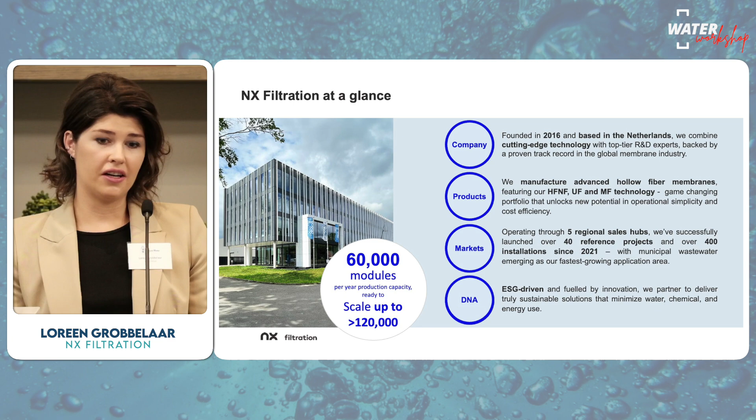It's well known that water scarcity is not only in South Africa, but globally. Climate change is contributing to groundwater sources being exhausted. Taking that into account, about 60% of the world's population currently lives in water scarce areas, leaving 2 out of 7 people without access to clean drinking water. That being said, there is a need for alternative sources to be used instead of just groundwater.

But these sources are usually polluted with micropollutants and medicinal waste. Just taking, for instance, the wastewater that we produce from normal domestic sewage, that is being treated conventionally, and that conventional treatment is not equipped to remove medicinal waste, for instance. And that effluent is just discharged into our rivers, where we then abstract water for drinking water using again conventional systems which do not remove these micropollutants.

So with that being said, there's a need for alternative technologies, new technologies. And with NX Filtration's nanofiltration membranes, we can remove some of those micropollutants without the need for chemical use, applying that water almost directly to the membranes.

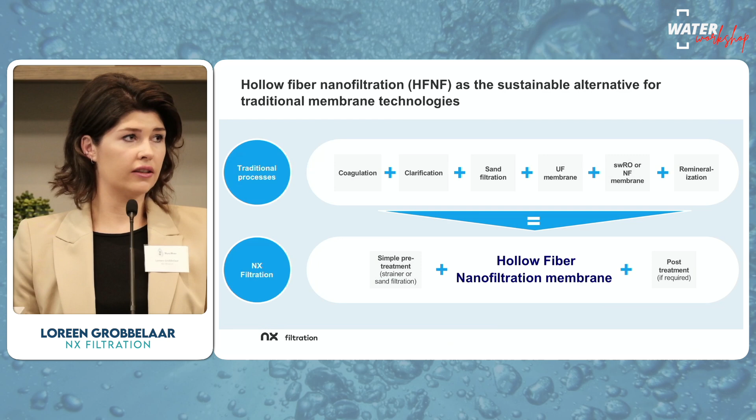Taking, for instance, a simple pretreatment like a strainer or in some cases a sand filter, and applying that filtrate to a hollow fiber nanofiltration system with a post-treatment can give you the same water quality or even better.

If we compare traditional nanofiltration to our hollow fiber nanofiltration membranes, what is the difference? We claim that our membranes can basically take on worse feed water quality - increased turbidity, suspended solids, which we take around peaks of 300 ppm, and also CODs ranging from 100 to 1,000 ppm.

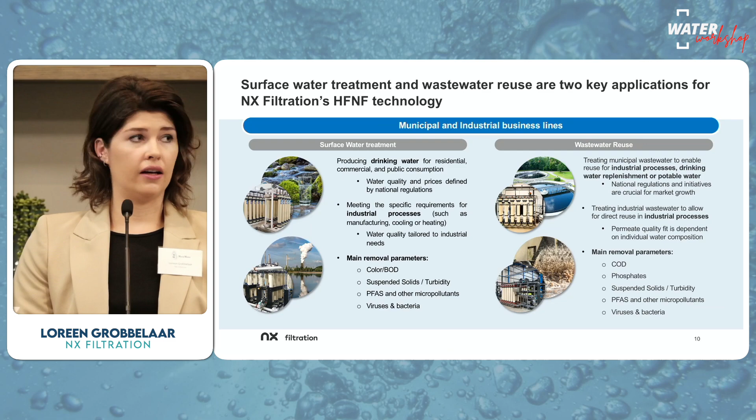On the industrial side, we've seen, for instance, pulp and paper - any wastewater that has been treated biologically can also be applied to the membranes relatively easily. In both cases, the main parameters that would be removed are organics, COD, BOD, color, and also some suspended solids turbidity, and then PFAS and micropollutants.

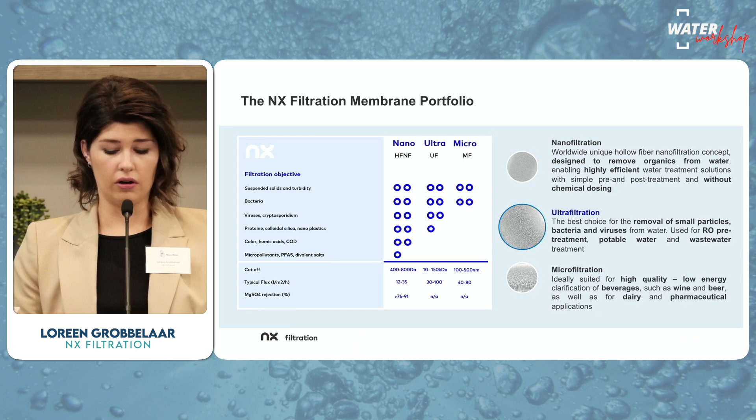Our filtration principles also apply mostly for the nanofiltration. All our membranes are PES based, single bore, and inside out. So with the PES membranes, should you use our membranes, you could be covered for future regulations where PFAS could become an issue.

On the ultrafiltration side, main applications would be potable water, municipal wastewater reuse again, and reverse osmosis pretreatment. That's where we mostly apply our ultrafiltration membranes, and then also in industrial wastewater reuse.

We've got a global base of ultrafiltration membranes, which might be something new to you because we are a nanofiltration company, right? So I will cover a little bit later that we also have a few replacement products available for the membranes that's currently in the market.

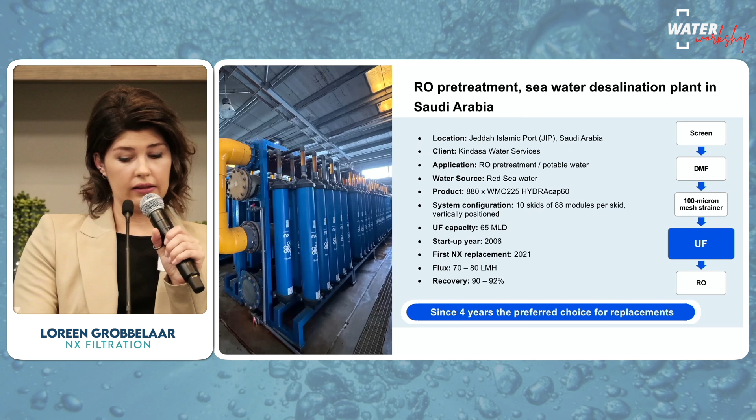RO pretreatment for seawater desalination in Saudi Arabia. At the port of Jeddah, we have a customer, Kindasa Water Services, which was one of the good performance declarations shown earlier, treating seawater from the Red Sea. There we've got 880 modules installed, the HYDRAcap60, which you might be familiar with from the Hydranautics range. System configuration: 10 skids, 88 modules, with our first replacement in 2021. High recoveries of 90 to 92%, just before reverse osmosis, for more than 4 years.

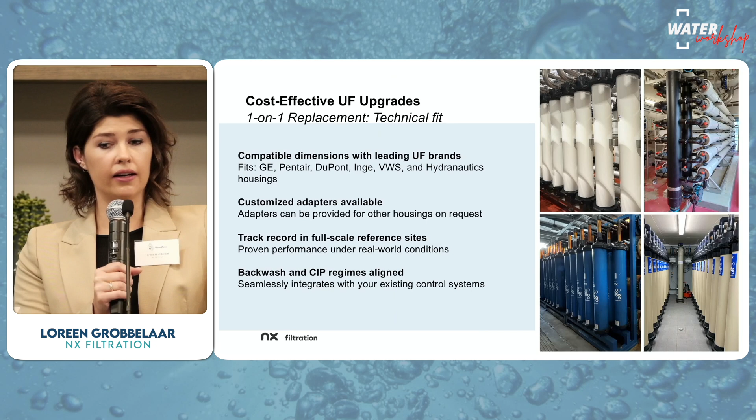As I've mentioned, we can replace our membranes cost effectively with one-on-one replacement. It's a technical fit with most membranes currently in the market, and our membranes can fit GE, Pentair, DuPont, Inge, Hydranautics, and also VWS. In cases where we do need adapters, we have those available, so we can do a retrofit or assist with a retrofit to your needs. All of our membranes are backwashable, and the normal CIP and cleaning methods are acceptable.

So I believe if you would like to discuss any replacement projects, I'm more than happy to discuss that further.

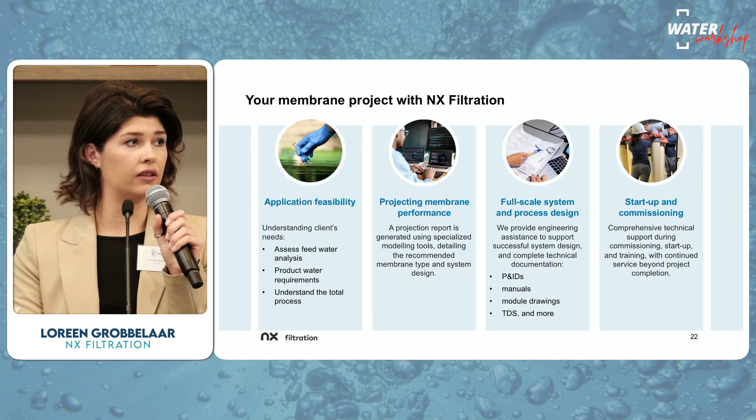Should you want to develop a membrane project with NX Filtration, we do application feasibility checks within our sales engineering team. We also have our own in-house projection software, so we usually assist with that. We assist with full-scale system design, so should you need any information from us or need assistance checking P&IDs, we have that expertise within our team. We can also assist with startup and commissioning of your plants.

Just to recap, I mentioned the unique features of HFNF and the main application areas, which are surface water and wastewater treatment, as well as UF applications and retrofitting capabilities, our membrane portfolio, and how you can develop your project along with us. I think in the end we've all got one mission, and that is our motto at NX Filtration: clean and affordable water for all. So, thank you.

Issues with PFAS - you may not have a problem depending on the membrane material, something to do with the manufacture and material of the membrane itself, particularly when it's not PES. Thanks for the question, Rob. Basically, PVDF manufacturing would eventually fall under regulation, under PFAS regulations or micropollutant regulations, and that is where we are already covered, to be all right with continuing our manufacturing. So does that mean that people making PVDF membranes - it's kind of bizarre, you're making membranes to treat water that are causing a PFAS problem. Is the PVDF manufacturing using PFAS material? Yeah, that is it. I didn't know this, I learned something today. Okay, thank you, thanks Rob.

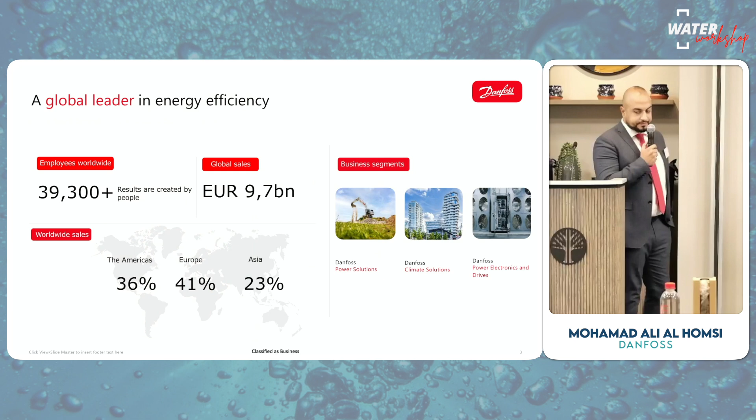About Danfoss, we are a group of more than 39,000 employees located worldwide across all continents, with global sales around 9.7 billion euro, and that's the whole segment. Danfoss is still a family-owned business, now in its third generation, in Denmark. We cover the whole continent—Americas, Europe, and Asia—and most of our sales comes from Europe.

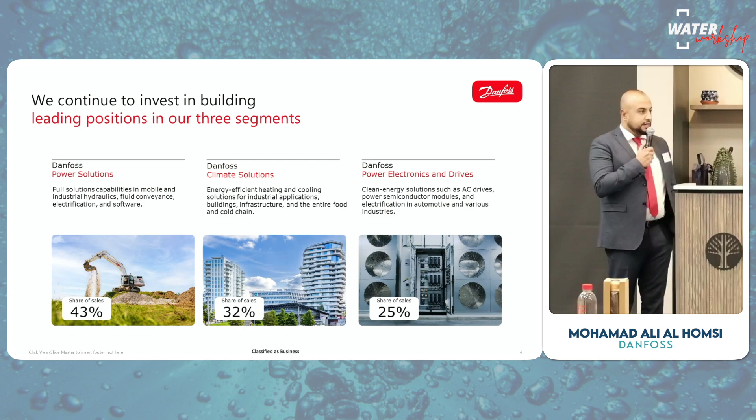On our application, or for our customers globally, we deal in desalination, water reuse, humidification, flat panel cleaning, firefighting, and gas turbine applications. It is based on the axial piston pump technology, and from application to application we just have some differences in the material.

Our APP, we call it our axial piston pump, is the high pressure pump. And we have our ERD, we call it iSave, energy recovery device. It is a device, ERD, motor, and booster pump in one body. And we have the active pressure exchanger, also called the motorized pressure exchanger, which is ERD plus motor.

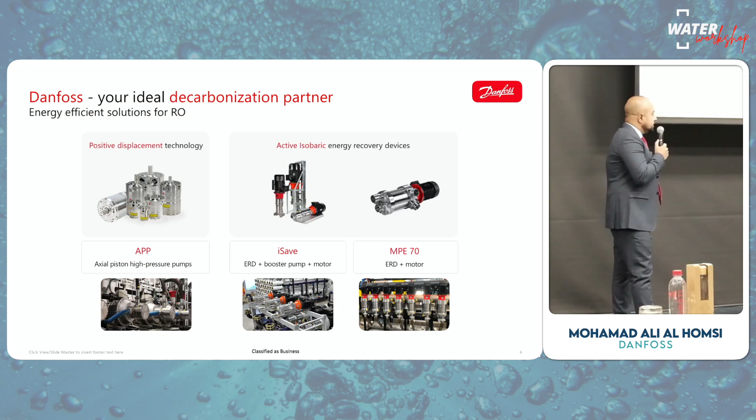So our APP, which is the axial piston pump, we can see in the picture here. We have a pump based on positive displacement technology, with efficiency up to 92%, 90% or 89% minimum at any point. It's a simple design pump and easy to use, made of duplex, super duplex, and in most cases fully super duplex material.

The range of the APP can start from 0.6 meter cube per hour up to 92 meter cube per hour as a single pump.

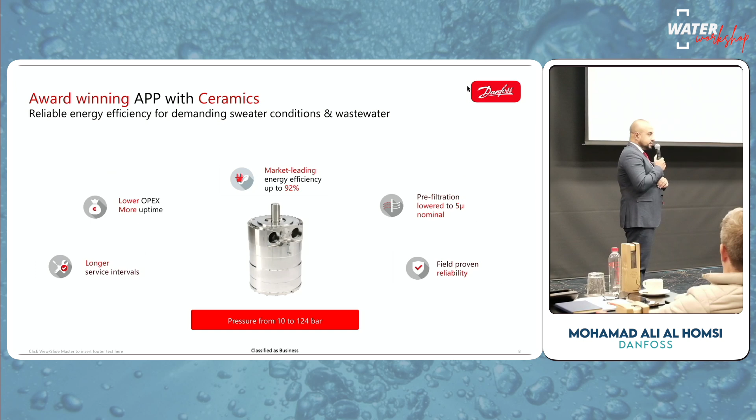So some improvement on our pump, we call it the ceramic pump. We change the PEEK material to ceramic, which lets us save in terms of pre-treatment cartridges. We can now use pre-filtration with 5 micron nominal standard filtration and get a longer service interval. Our basic or standard pump is up to 8,000 hours, and now we double that to 16,000 hours by changing some components from PEEK to ceramic material.

Maybe we can see the next page.

Want to add something on the ceramic? We're very proud of this, first of all, because it's an award-winning pump as well. We won an award at EDS two years back, and since then we have more than 50 installations worldwide so far, for both desalination and water reuse.

Coming back to this point, the key parts - the valve plate, the port plate, and the swash plate - which are the major wear parts of the axial piston pump, have been changed into ceramic components. And the pistons are hardened, so it's perfect for very demanding, harsh water conditions, especially industrial wastewater. It's also available in different sealings to accommodate those harsh water conditions.

So a question also here - how do we need to jump to what value we are adding in the water treatment business, especially when it comes to high pressure pumps, and what is the difference between our axial piston pump and the centrifugal pump? So next for you, Amogh, also.

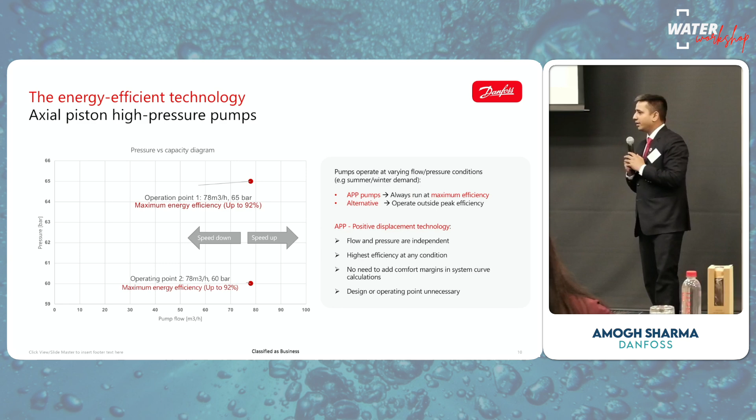Normally what we've seen, when we are designing our plants and systems, we look at different pressure, flow, and so on, and we design based on that - we choose the actual pump and the energy recovery device. But those conditions are constant, while the world is not constant.

So the key benefit you get with an axial piston pump compared to a conventional centrifugal pump is consistent high energy efficiency across the flow, irrespective of flow and pressure change. The efficiency is independent of flow and pressure, and you don't need any extra comfort margins in the system curve. You can design your system without worrying about looking at the best efficiency point for the centrifugal pump - you can just design it, and that gives you design and operational flexibility as well.

For example, if we are designing a 10 meter cube per hour flow at 10 bar, we can get the 10 meter cube per hour, and at 80 bar we can also get the same flow. So it depends on the axial piston pump.

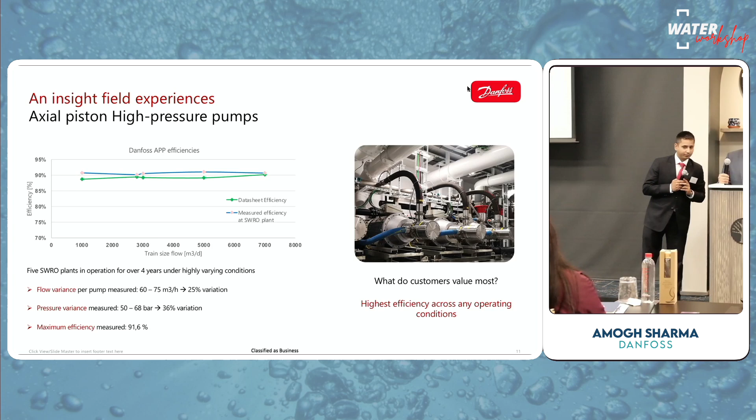So as I said, the more everything is constant when we are designing statically - the electricity price, the permeate production recovery rate, and the seawater temperature. But in the real world, nothing is static, because membrane pressure changes across the season. There are daily electricity price variations due to geopolitical situations, and water demand variation also changes depending on rainfall or how much water they want to produce. This impacts the total system efficiency.

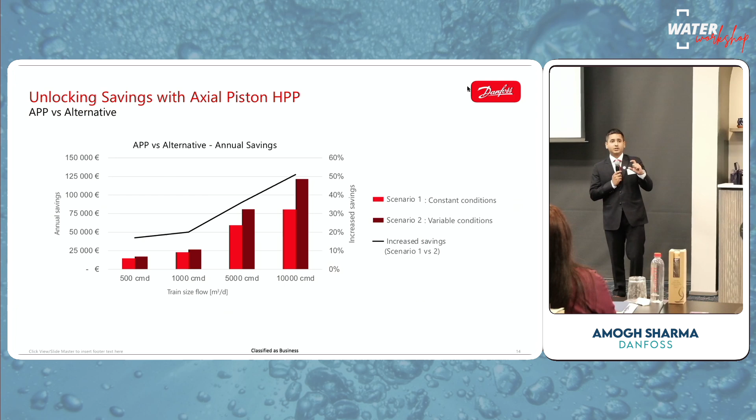So based on these two scenarios, a static and a variable, we'll show quickly the impact on the savings you can have with the axial piston pump compared to the centrifugal pump, from train size 500 to 10,000 CMD plant. If you look at the constant condition, the brighter red, you'll see lower savings. In the variable, changing world, you see even more savings versus the conventional centrifugal pump technology when you use an axial piston pump, because the energy efficiency remains constant irrespective of the flow, pressure, or any external factors.

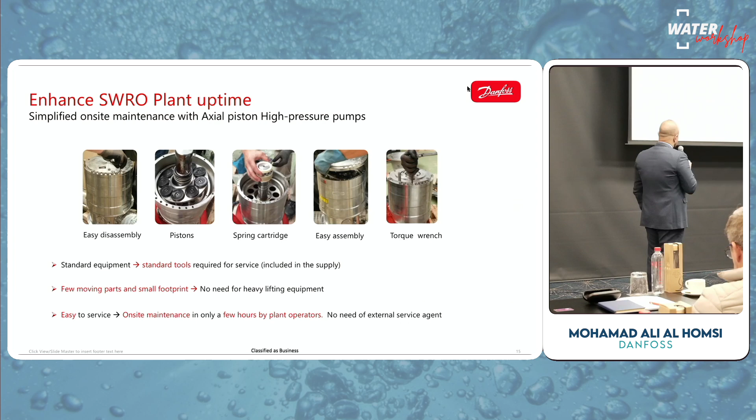And then it's easy to service. On site it takes few hours, and Derek here has the most experience with our pump on site. You're smiling, so is it easy or is it a hard one? Easy one, yeah.

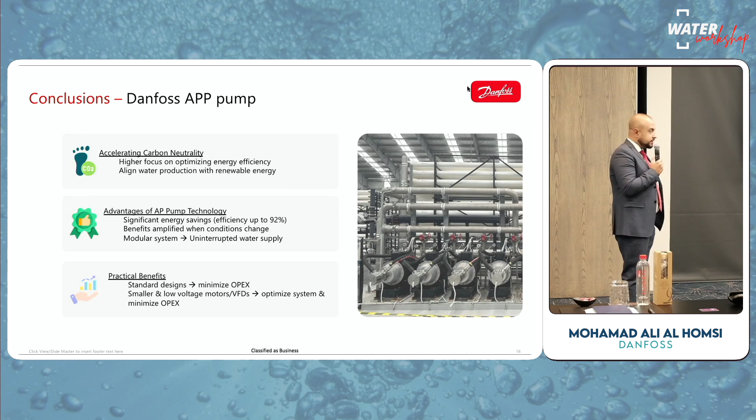So in conclusion, we have value in our pump, coming with 30 or 35 years of experience. Our pump is made in Denmark, at our one factory in Nordborg, near the Danfoss HQ, and we always speak efficiency in pumps. Next we will see the ERD, the energy recovery device, that we've been talking about.

So we have two types of ERD. The first one, the iSave, is a patent technology from 2008, with the first field application in 2009. Our iSave is mostly for containerized applications. We can start from 200 meter cube per day plant up to 3,000 meter cube per day, where we can fit the APP pump plus the iSave.

When we speak about larger systems, we prefer to go with the motorized pressure exchanger, so the booster will be separated. It's the same device, but we remove the booster pump from the iSave, and it becomes a separate isobaric system. We have more than 15 years of experience and 3,000 worldwide references with our ERDs.

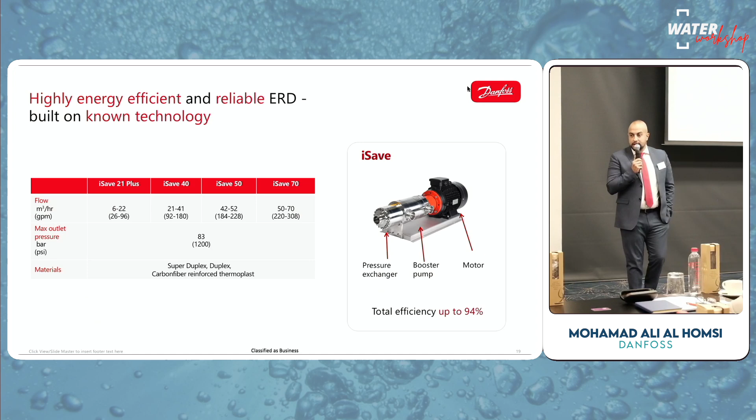So for the iSave models, we have 4 models, depending on the reject flow. The iSave 21 has a 21 meter cube per hour reject, up to the iSave 70. It's fully super duplex material on the high pressure and wetted parts. As you can see here: pressure exchanger, booster pump, and electrical motor, and it is VFD driven.

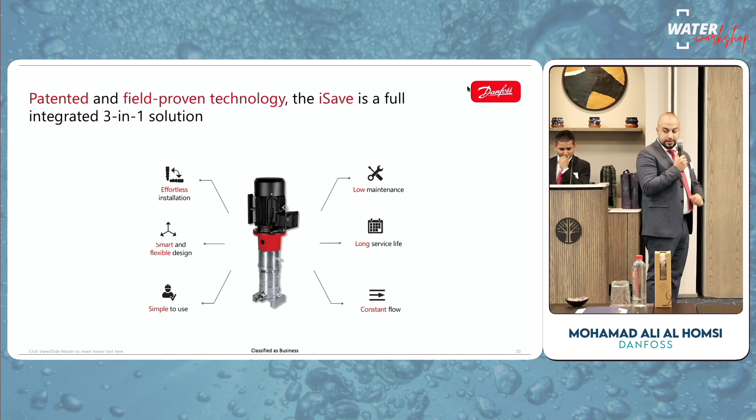So it's an integrated solution - 3-in-1, compact. It can be installed horizontal or vertical to save footprint. How the iSave works - we won't go into too much technical detail - but it's a device that gets the brine or high concentrated flow into a pressure exchanger, and then pumps it back to the same line, so we can save up to 50 to 60% of the power consumption of the SWRO plant.

So just a comparison, because in the market we have the isobaric pressure exchanger, and on the left side we see the iSave. Here we can see more components needed - pressure exchanger, motor, super duplex material, and high pressure flow meter. If you compare it to our iSave, it's one product that can replace the whole set on the right side.

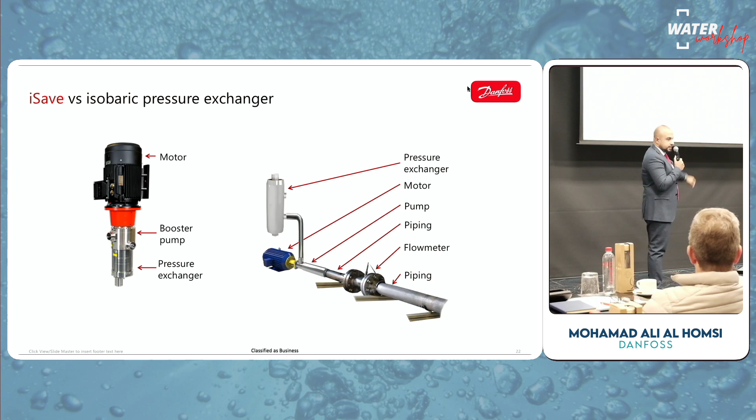That's an idea about the motorized pressure exchanger - typically the same in terms of efficiency and material as the iSave, but motorized without a booster pump. And we use that again for the larger systems.

In the MPE 70 or iSave 70, we prefer to have the motorized side to have benefits for you on the market on the control. It's purely control based, VFD driven, protecting your system. And in terms of material, it's a super duplex material.

So just before we go to the next slide, a question for you, Homsi. We have up to 92 cubic meters. So what if you want to go for the mega plants, like in the region you are handling?

Yeah, so instead we have a limitation in our pump up to 92 meter cube per hour. When it comes to larger systems, we design our system to go with parallel systems in terms of pumps, and this gives a lot of benefits—let's call it no pump, no water. So when you have two parallel pumps, you can cover your system, and you have a compact design more to control the efficiency and the design.

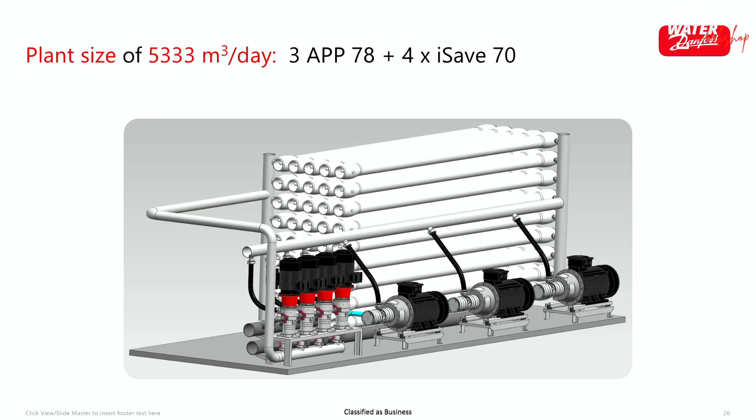But of course, the beauty about our products is that they are compact, so you can fit it in a container. If you want more water, you can add extra modules, so you don't need so much infrastructure to build. Rather, you can have containerized systems where you can just add it just like Lego. That's 16,000 cubic meters per day, so per train it's around 5,000.

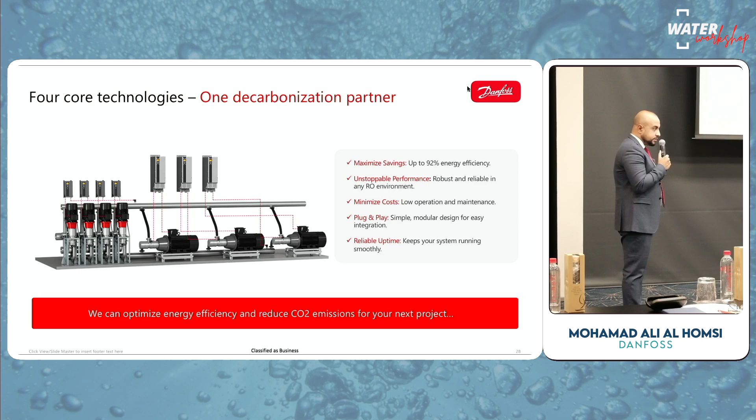And just at the end, we have 4 core technologies that can support you in the design of the plants: pumps, ERDs, variable frequency drives, and the sensing solution. So it's 4 core technologies where we can really be a partner for you in the design stage.

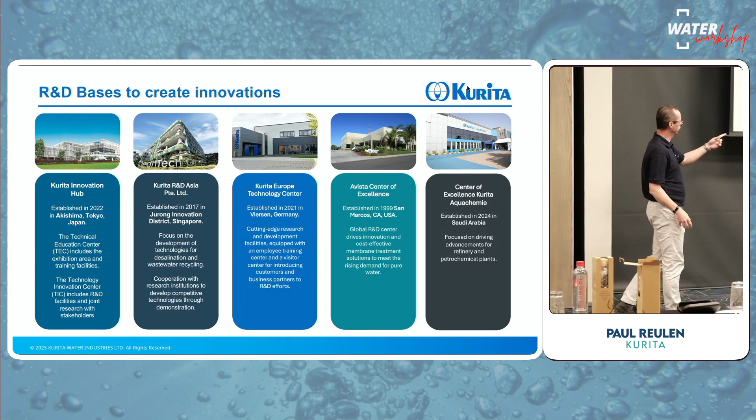The next one is in Singapore. We also have a technology center in Europe, one in the US, and the latest addition is a technology center in Saudi Arabia.

Just a little bit about the numbers: our annual sales is around $2.3 billion US dollars. We have more than 7,000 employees in 110 countries. We spend 1.9% of our income on R&D, so 50 million euro annually. We have more than 200 people in R&D across the 5 facilities, and as I said, more than 2,500 patents on products and product applications.

I'm going to mention 5 or 6 of these technologies very shortly so that you get an idea of what we are doing.

We call it CSV, creating shared value. We want to create a situation where we apply our products and technologies that create a win-win-win situation. The customer wins because we can save water and energy and reduce total cost of operation. Kurita can make some profit, which we reinvest in R&D to innovate our products again.

The next winner is the environment, because if we can save water and energy, then we don't have 40-degree temperatures in the Netherlands, right Loreen? It's going to be very hot. And Marius, we don't have so much rain anymore in Cape Town, sometimes it's very dry and now it's raining - this is because of climate change. Everybody who would deny this is a little bit ignorant. Many things are happening, and we are trying to play a role with this.

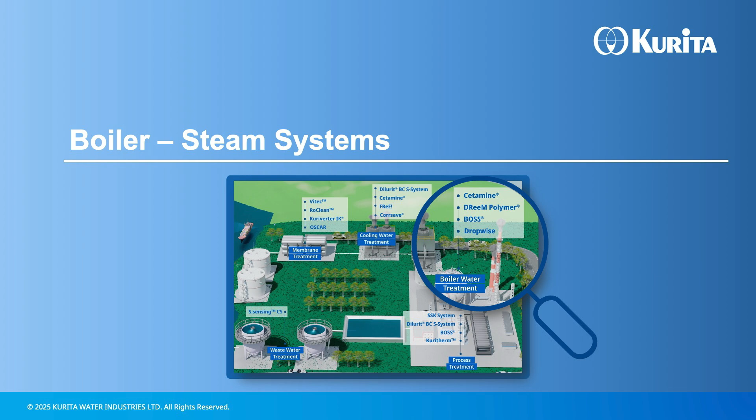I'm going to mention, like I said, 5 or 6 different technologies that for sure can contribute to sustainability targets. I'll just give you a bird's eye view of these technologies. First of all is a boiler water treatment chemical.

It's called cetamine. Cetamine is a range of products that was established already a few decades ago. So how can cetamine help our customers?

Traditionally, boilers are treated with different chemicals, sometimes 3 or 4. You have an oxygen scavenger, a phosphate for internal treatment, an amine or amine mixture for your steam and condensate lines, and sometimes even a dispersant if you have problems with suspended solids or sludge formation in your boiler. Cetamine is a product range based on filming amines.

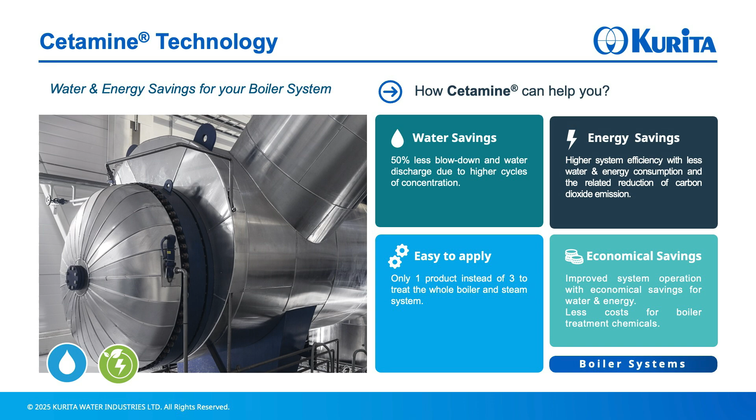It's a 1-drum product, so you only have 1 chemical that goes through your entire system. It is volatile, and it creates a very thin monomolecular film on the metal surface, and this goes through your entire system.

As you know, for corrosion phenomena, you need water, iron, and oxygen. So if you separate the iron from the water, there can be no corrosion. The concept behind this technology is completely different. Once you add this in your boiler, your whole system will be protected. That's the concept behind this chemical.

It's easy to apply. It's very efficient in use. And the biggest benefit is in the water and energy saving.

This chemical does not contribute to conductivity in your water. The contribution is very minimal. So when you replace traditional conventional treatment with this chemical, you will see the conductivity sharply going down.

When the conductivity goes down, you can reduce the blowdown settings of your boiler. When you reduce the blowdown, you need less water. When you need less water, you need less energy. When you need less energy, you produce less CO2. It's very simple, right? But this is how it works, so it contributes heavily to water savings.

There's a lot of other benefits connected to cetamine. For example, it's a chemical that is stable under dry and stagnant conditions. So even if you shut down your boiler, you can still be protected for 3, 4, 5, 6 months, with no special layup procedures. Iron transport will be reduced even when you start up after 6 months.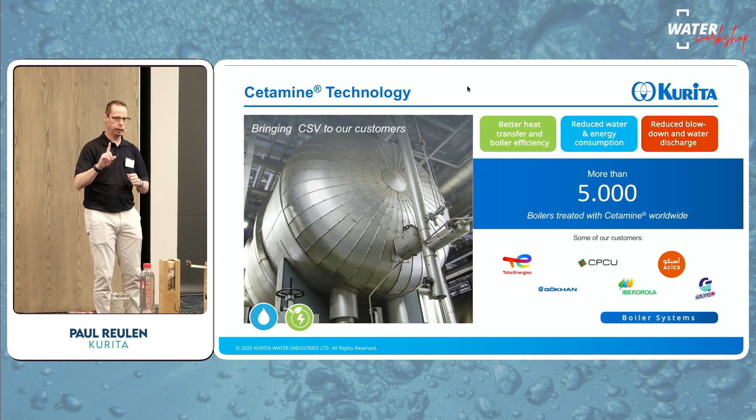In addition, we also have products that have a direct food allowance, so it can be used in direct contact with food, except in the dairy industry, because milk products actually react with the cetamine, so we cannot use it in direct contact with milk products, but in all other industries it can be used in direct contact.

The second one is also for a boiler. This is called a DReeM Polymer. And the reason why this product was developed is that in this world there's a lot of low pressure boilers that are being fed with softened water, and 80% of these softeners have a problem.

So all of these boilers are creating a scaling problem, and then the go-to idea is to descale using an acid. So you would use an acid to descale, and again the softener doesn't work, so you do an acid cleaning again, and you do it every month. I see it especially in East Africa. 99% of low pressure boilers have a scaling problem, and they use more citric acid than they use an antiscalant. So the antiscalant, of course, doesn't work if your softener is not working.

And this DReeM Polymer was established as a replacement of that process. The DReeM Polymer is a polymer that can be formulated even with the cetamine that cleans your boiler online. So you don't have to take it offline and clean it with an acid, it cleans it actually online. Depending on the thickness, it can take a few weeks or a few months, but finally it cleans up the boiler completely from any scale.

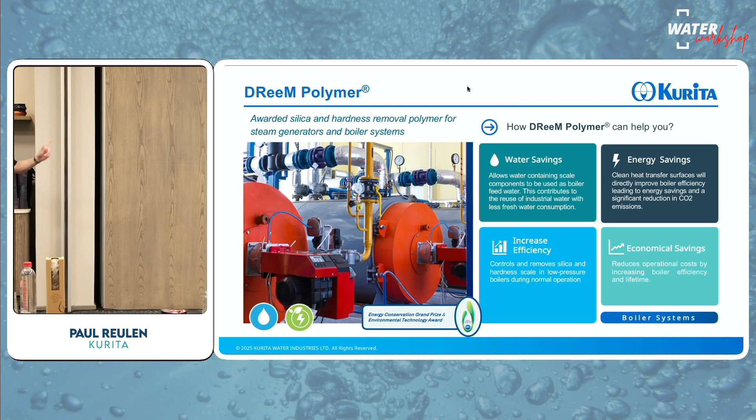We have many case studies, and you can see the difference between before and after. Sometimes it takes a few weeks, sometimes a few months, sometimes even a year if the layer is very thick, but you don't have to do offline cleaning anymore. You can keep on running, and the scale will be removed and prevented over time.

Also, to connect to the Danfoss guys, this one is also awarded - this awarded chemical.

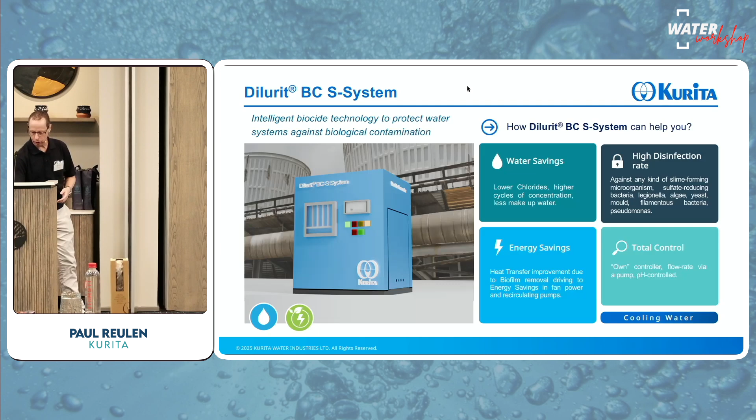Then for cooling water, Dilurit BC S. Dilurit BC S is an in situ biocide system. This chemical technology was created as a replacement for chlorination. Maybe in Africa the discharge regulations for chlorine aren't as severe as in Europe, but in Europe most countries now have a limitation of free chlorine of 0.1 in the discharge. And 0.1 ppm of free chlorine is not enough to sterilize your cooling water. So we found a replacement, called Dilurit BC S.

This system creates a monochloramine, and monochloramine has many advantages over traditional chlorination, as explained in the next slide. It's a bit small, but it's an in situ generated biocide. It has a much lower oxidation potential, so the corrosion phenomena coming from this biocide are much less.

There's no bromine inside - bromine is much more toxic and has many restrictions. It can save you water because it doesn't decompose to chlorides, which contribute to corrosion phenomena. It has almost no AOX, so almost no free chlorine comes from this product. It's easy to monitor with the total chlorine analyzer. It also has a lower carbon footprint.

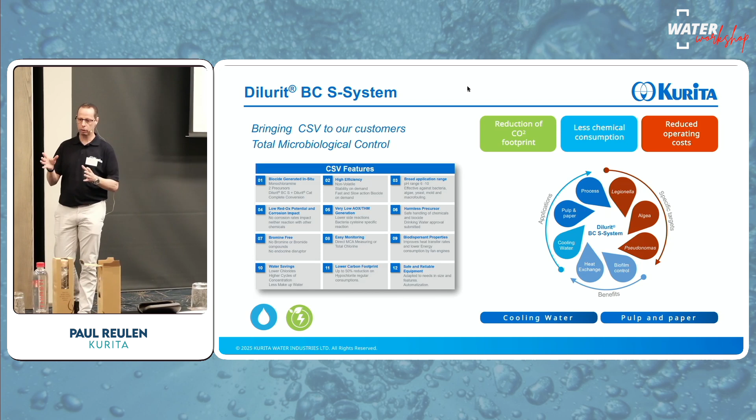The BCS actually has the power to penetrate into biofilm much more than chlorine does. So when you remove biofilm from the packing of your cooling tower, you need less energy to pull the air through - it creates energy efficiency, and again it's reducing CO2 production.

I think those are the main features. It's used in cooling water in industry, but also in paper manufacturing, in paper machines - this technology is used because slime formation is very common in paper manufacturing, and it's much better than chlorine. Chlorine would also cause breakage of paper due to its oxidation power and leaching of calcium from the paper. So this technology is also very valuable for the pulp and paper industry.

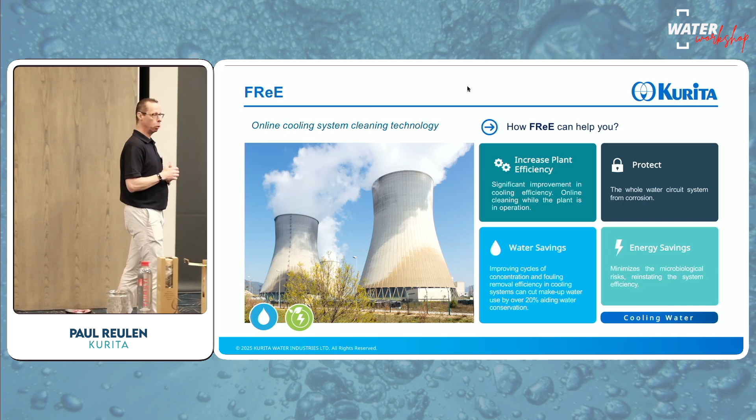Next, FReE technology - again for cooling water. This development was a bit of a coincidence. We were trying to find out if we could use filming amines for open cooling water systems. This is a topic because a filming amine is food for bacteria since it contains nitrogen, and we were trying to find out how much it decomposes when used in an open cooling water system.

Finally we saw, when applying certain types of filming amines derived from the cetamine brand basically, that when we started adding filming amines into the cooling tower, it began cleaning up the packing material.

The packing in a cooling tower most of the time has fouling - inorganic and organic materials combined that eventually plug it, and there's no real way to clean it. The only thing you can do is replace the whole packing and put a new one, but then due to the very high evaporation in your packing material, you get more scaling and biofouling again, and you cannot remove it.

We found that this product can actually remove it online, so you don't have to replace your packing - it will clean it up nicely. Because it's a filming amine, it creates a layer on your packing material that prevents scaling and biofouling from happening again. It's very nice, especially in cooling towers generating fouling due to high evaporation rate or high biological contamination. It was a bit of a coincidence, but an absolutely brilliant product.

You can imagine this will also contribute to lower energy consumption, because with better flow of air through the packing, you need less energy for the fan. We have different case studies for this that we could share. If it can remove biofilm, it will really reduce the scaling tendency in the packing and keep it clean. So BCS together with this technology is a brilliant way to prevent biological contaminations.

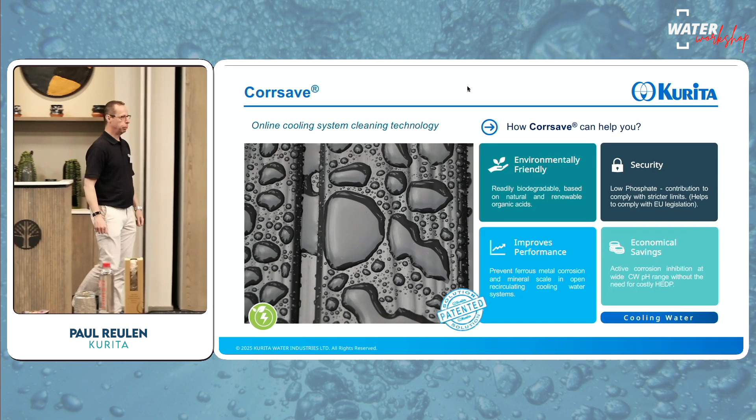Next one is Corrsave. This is again a patented product. As some of you may know, cooling water treatment corrosion inhibition is traditionally done with zinc and phosphate, but zinc and phosphate are environmentally polluting. So we have been trying to find a way to replace the zinc and phosphate, and we developed a polymer called Corrsave. It's a biodegradable polymer that actually has even better corrosion and anti-scaling characteristics than zinc and phosphate or phosphonates together. So it's environmentally friendly, reducing impact on the environment while keeping the same performance. This one is very simple to explain, basically.

This also contributes because in many countries there are limitations on zinc discharge and phosphorus discharge. So if you have such limitations, this product can help you achieve your discharge regulations. Again, there are many different products containing this, and there are different case studies on it. So with less phosphate and less zinc, you achieve better corrosion inhibition, and it's biodegradable.

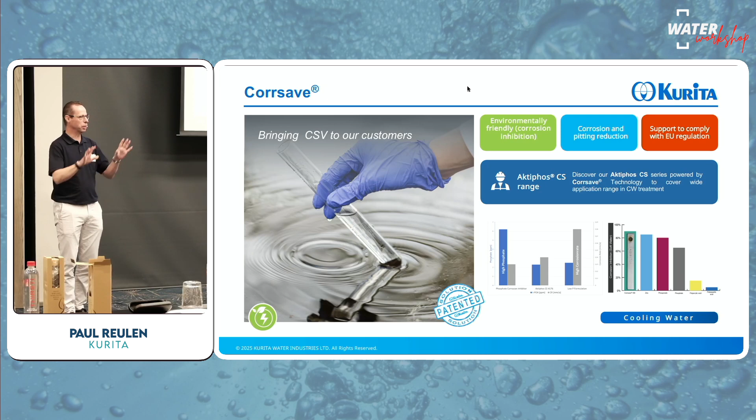Sometimes I see in tenders that they are asking for environmentally friendly biocide. It's a very interesting request, just as a side step. So this one is really environmentally friendly, yeah.

Okay, membrane systems. Dan is going to talk more about membrane systems, but I didn't want to skip this chemical. Traditionally, biological contaminations are treated using chlorine in front of the RO, and then you use SMBS to neutralize this. But unfortunately, this system is not perfect, so there's always a little bit of chlorine going to the membrane. You will get some oxidation, and at a certain point you have to exchange your membranes. In addition, chlorine cannot penetrate into biofilm—it has been proven that it cannot. So if you have biofilm, the chlorine might kill the top layer, but it cannot fully penetrate it.

So the Kurita IK110 and 220 products were established actually to do this and release it. This is also a patented product. It has been proven it can penetrate into biofilm and actually release it from the surface, so it will significantly increase the run length of your membranes. The good thing is you don't need to neutralize this, so you can feed it into the intake of your RO system. It can go all the way to your membrane and will actually remove the biofilm from it, then be rejected. This is also the first online biocide with an NSF certification, so it can be used in drinking water preparation, especially when you have a high biological load. This is an absolutely brilliant product to remove biofilm and keep it clean.

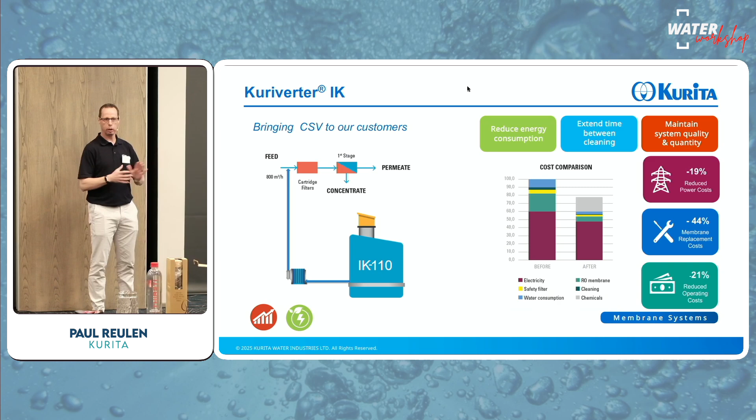So yeah, it's a very easy to use chemical. You don't need to neutralize it or anything—you just feed it at the intake and it goes all through your system. Finally, you will see that membrane replacement goes down, your chemical cost goes up, but all the other costs—energy cost, replacement cost, CIP chemical use—will also go down. So finally, it's contributing to sustainability. We have less CO2 production, etc., and finally we can achieve savings. Here is an example: 20% on your total operational cost using this product. So you're shifting the cost a little bit, but at the end, you're saving money.

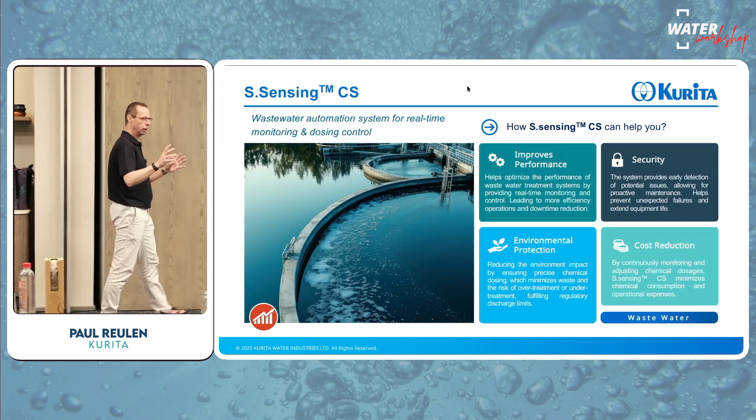Wastewater. So SensingCS is a device. Everybody working with wastewater treatment knows that if you have fluctuating influent or effluent water, you need to do a jar test every day, every 2 days, every week, sometimes 3 times per day. You jar test, find the best dosage, then go to the pump and set it. But then your influent or effluent changes again, so you need another jar test.

SensingCS is a laser-based device - a small probe that sends a laser signal into your influent or sedimentation tank, measuring the turbidity between the flocs. When you use a flocculant, you want flocks to be created, not turbidity - the lower the turbidity, the better. This device connects to the dosing pump of your flocculant, continuously measuring turbidity between the flocks and continuously adjusting the dosing. So it's essentially an automatic jar test.

You no longer have to do jar testing. It has been proven that we can realistically save 20 to 40% of chemical dosage and consumption. Our goal as a company is not to sell you more chemical, but to sell you less chemical with higher profit - because then we can reinvest in research and development and keep innovating our products. Everyone wins: the environment wins, the customer wins, Kurita wins. Very interesting device.

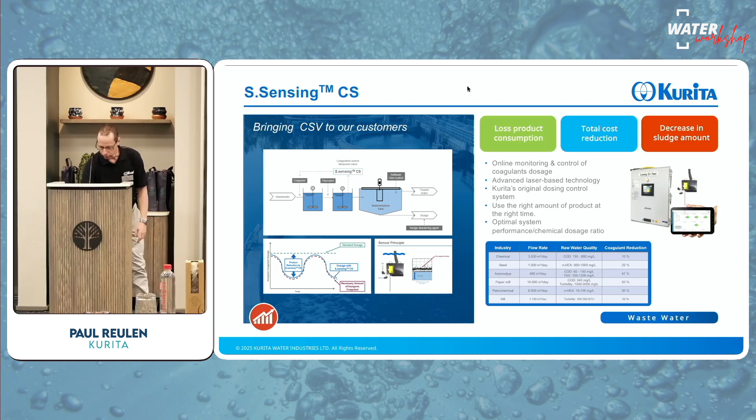I see I have to go a little bit faster. This one I can do very quick - Kurita Connect 360.

I think this is my last slide. Yes, I'm sorry I used 32 minutes instead of 25, but at least now you'll get coffee very quickly. Are there any questions?

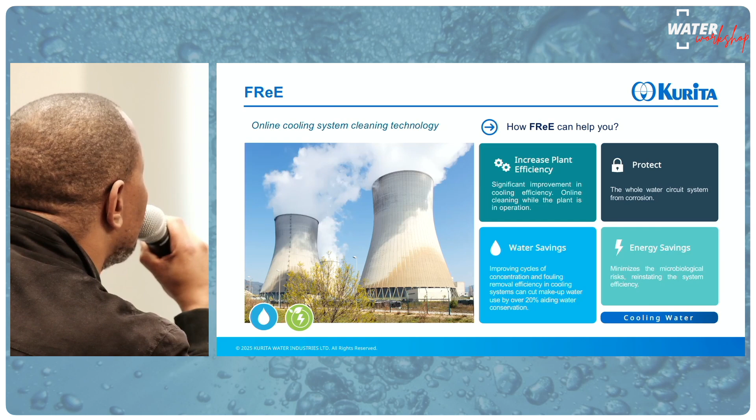So what cycles of concentration were they running at before you installed this system, and what did they achieve afterwards in terms of cycles? What happens in many cases, if you have high fouling in your cooling water systems, you normally have to blow down more, right? But if you can prevent it from sticking everywhere, then most of the time you can increase your cycles of concentration, because the risk of deposition is reduced when you catch it as a dispersant and move it in the blowdown. So then you can actually increase it. It's about the dispersing power that you create that might increase the cycles of concentration. That's the idea behind it.

But in terms of a case study, do you have the actual figure? Yeah, we can provide you some more details and case studies, because we run at high cycles of concentration in our power plants at Eskom in an effort to conserve water, but we do have issues with scaling and fouling. So yeah, I'll be interested to see that. Thanks. Thank you.

Everybody wants some coffee now, I think. Anyway, thank you very much for listening. Appreciate your time. Thank you.

Hope that was some good coffee. Hope you enjoyed that. So the next three presentations will all be real-world applications, things that are being seen around the world, and hopefully have application to what you're seeing in your consulting or your actual plants.

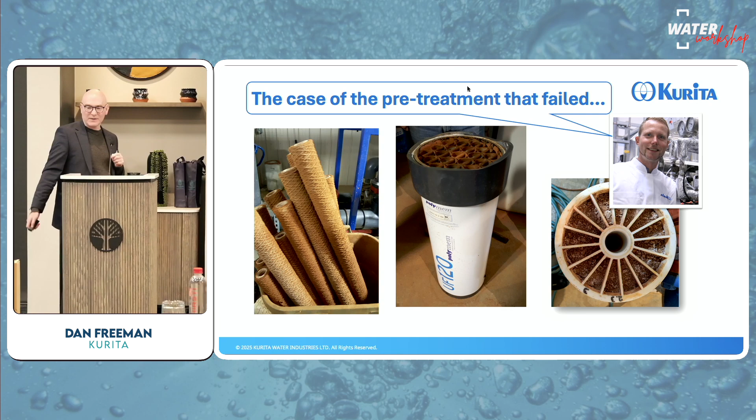When we open one of those membranes up, this is what we are seeing. If you know anything about this kind of problem, even from the color you're going to have a good idea that this is an iron problem. Iron problems are pretty common. When we take a look at the SEM image, we have iron present, but we also have a lot of calcium. Iron and calcium carbonate scale often precipitate together because the iron will actually deactivate the antiscalant.

So if you have a lot of iron in the feed water and you don't account for that in your dose rate of the antiscalant, you will often see not only the iron precipitate but calcium carbonate also. And that's what's happened in this case.

In this particular scheme, what the operator is trying to do is oxidize all of the iron that comes up with the water, give it enough residence time so that it precipitates, and then remove it with the ultrafiltration system. Obviously, when we looked at the ultrafiltration system, you can see that already it's pretty overloaded with iron, so this system wasn't working. Basically, there's not enough residence time for the permanganate to oxidize the iron and remove all of it, because it's passing through the system to the RO. And even if it does, the ultrafiltration system is struggling to cope with the amount of iron that's present.

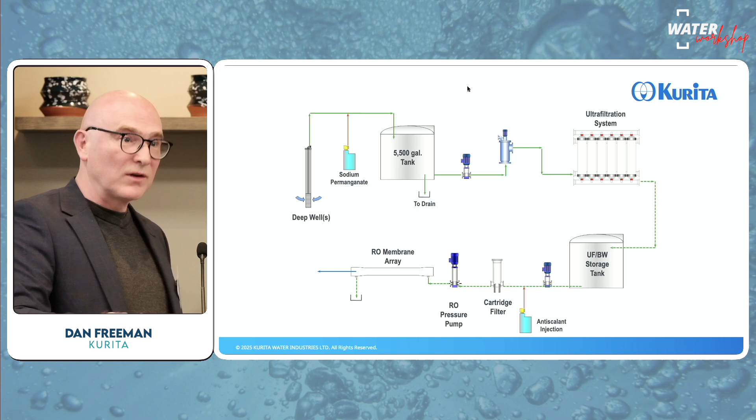So what was the solution to this case? In fact, what they did was to bypass nearly all the pre-treatment for the RO. The idea is that if you keep the iron in the soluble form as ferrous iron rather than ferric, it will pass through the membrane system without precipitating, and it's not an issue for the antiscalant. So that's what they actually did in this system.

The issue you have to be very careful of when applying this kind of system is that if the iron oxidizes at the membrane surface, it will damage the membrane. There are intermediates in the oxidation process, free radicals, that will damage the membrane. So if we attempt this, bypassing the pre-treatment, we have to make sure there is genuinely an anaerobic environment that passes all the way through the system.

In terms of cleaning the membranes in the system, iron is a relatively easy material to remove. In this case, we have a particular cleaner that's very effective at removing iron. So we're able to recover the membranes in the system, and by making this change to the pre-treatment, this system runs well. That's kind of an example of that.

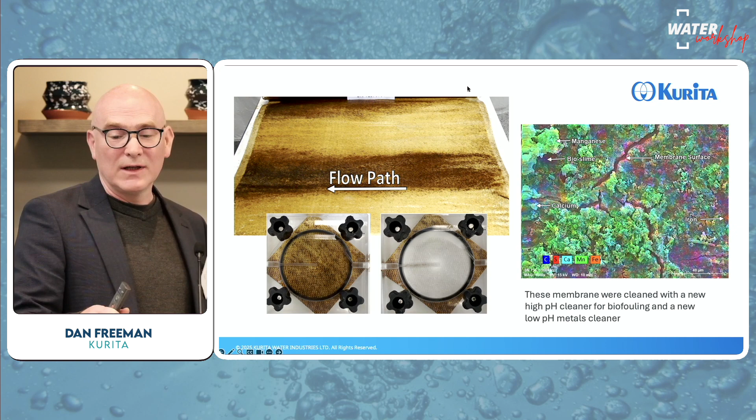And of course, in this case, not doing that has led to an issue. This kind of foulant, again, is iron, manganese, and calcium carbonate, particular problems. These things we can clean up, we were able to clean this system up pretty well. This is a SEM image from a different system, but had a similar problem.

It's actually a trace of the cleaner, the same sort of cleaner. It's damaged the membrane and left some traces. You often see other things other cleaners can cause on the CEI too. Sometimes you see where citric acid has been used for removing scale. Calcium citrate is not particularly soluble, so if you don't control the pH well when using citric acid, you can see there's more of a problem.

You actually precipitate a scale during the cleaning process. That's something else we see quite often on the CEI. You wouldn't expect to see calcium citrate on a membrane surface. Also, there are certain limits in terms of what you can use for surfactants. Many commonly used surfactants are a problem for RO membranes. So if you use the wrong cleaner, you can usually pick these things up on the CEI.

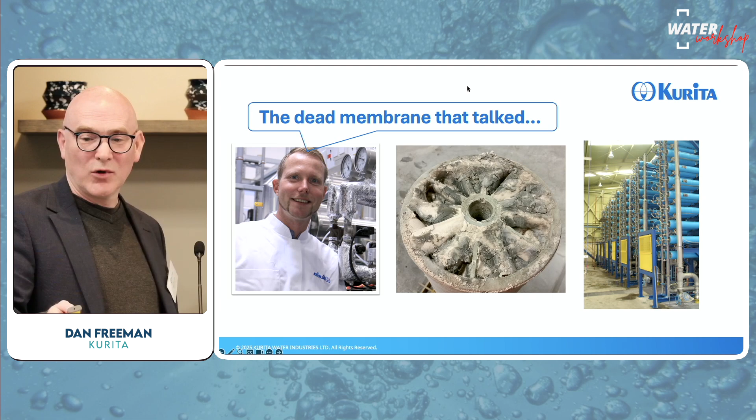Here you can see very clearly that this is a scale issue, calcium sulfate scale. We cannot recover that element, but it tells us there's an issue, or has been an issue, with the antiscalant, because if you're using the correct antiscalant, you shouldn't see scale form. It tells us what we need to do to clean whatever elements are still recoverable in the system, so we can select a cleaner for that particular challenge. Even though that membrane's lost, we can still make use of the information it tells us for that element, for that system.

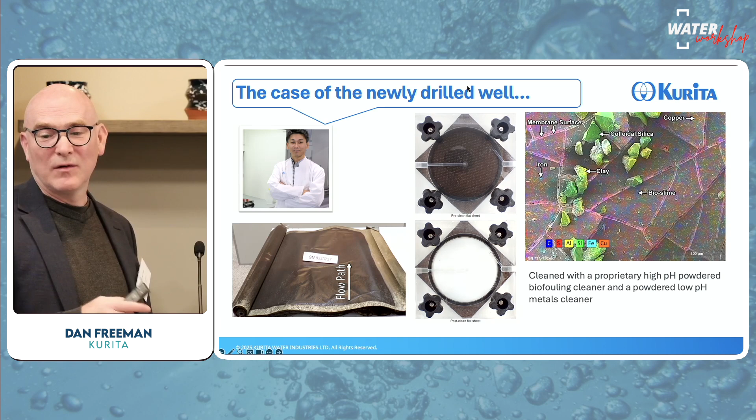This is another system from a well, another CEI from a well system. Again, you can see unusual contaminants here that have come from the process upstream when they drilled the well. We've got copper, which is very unusual to see on most membranes, and other issues. Again, we were able to clean this particular system up with a proprietary cleaner.

This is a UF system. It had a very, very low flux. But when we opened up the membrane module and looked at the membranes, there was not that much there to see. Given the performance of the membrane, we were expecting much more material on the membrane surface. When we looked at the CEI, though, you can see that there is a very uniform, consistent layer of material on the membrane surface.

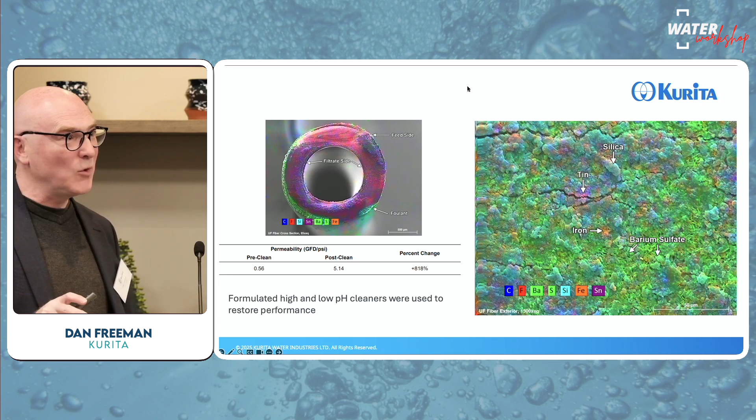You can spend a lot of time trying different things to try and recover a system, but actually taking a membrane out, looking at what's there, and doing a test in the lab to see which is the best cleaner is key. Sometimes when you have multiple foulants, it's actually the order that you apply different cleaners that's as important as anything. So taking a membrane out and doing those experiments in the lab can be really valuable in terms of recovering the system.

This is the last example, and it's a contrast to the previous one. It's very clear that we have a problem on these membranes. You can see there's a lot of material on the membrane surface. Again, very poor flux, but by applying two cleaners in combination, we're able to address the issues here. The primary issue again is iron, also some silicates, although it's not so clear on this CEI. But again, we're able to recover the system, and we know what we need to do. Once we've done this autopsy, once we've looked at the membrane surface, we know what we're looking to do.

Okay, so that's a small example of some of the autopsies that we have conducted. We do about 350 autopsies a year in our global laboratories. That experience is where we get the basis of understanding what chemicals we need to apply. Also, when we're developing new chemicals or looking for new solutions, it's a great database for us to understand what challenges people are facing with different waters. It's really the basis of our experience—it comes from a lot of those autopsies that we're performing.

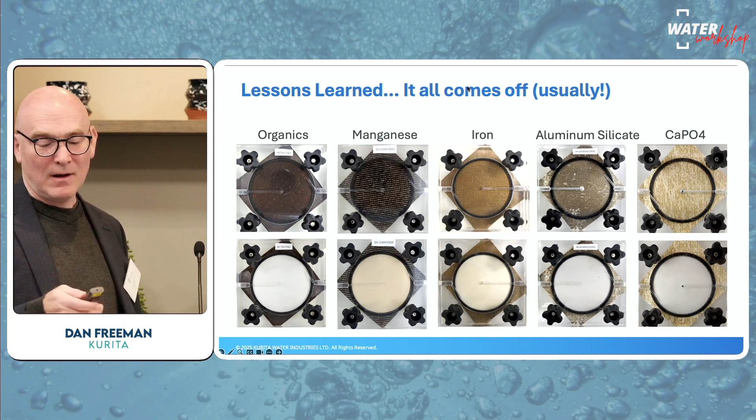Okay. I'll leave it there. I've got 3 minutes left, so there's enough time for a few questions. Anyone got any questions?

Yeah, thank you. That was cool. I've never seen those surface pictures like that with color—really, really interesting. Just a quick one.

You showed that one of the images was gypsum scaling on an RO—a calcium sulfate scale on an RO membrane. Have you also looked at... gypsum is a big issue in mine water in South Africa in particular, and a lot of the mine water plants are operating high recovery with anti-scalants, then trying to precipitate the gypsum out of the brine, managing that in multiple processes, and in some cases going to thermal evaporators for the brine stream.

Do you have experience with managing the precipitation of gypsum in thermal evaporator systems? Not so much—it's not really an RO question, it's a brine stream question. I don't actually, but that's something we'd be interested to talk to you about, because really, that's a solution. If there are issues there, that's kind of our modus operandi—to go and see what the issue is and try to find a solution. We have a lot of experience with that scale, not just in membrane situations but in cooling towers and so forth. It's one of our key technologies. So yeah, managing that sort of thing is something we'd look into.

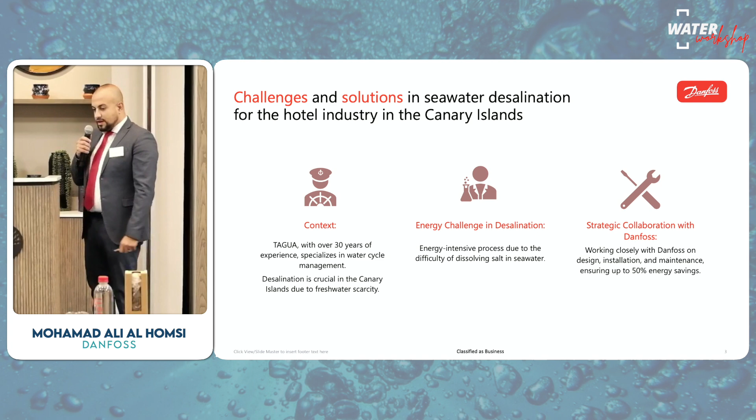So one of the challenges we will show you is a case in Canary Island with our customer Tagua. As we know, in Canary Island we don't have any source of water, only the sea. So it's quite a challenge to get fresh water, and energy is one of the challenges faced by the clients there and the population. So we have been in collaboration with Tagua on how to optimize the system.

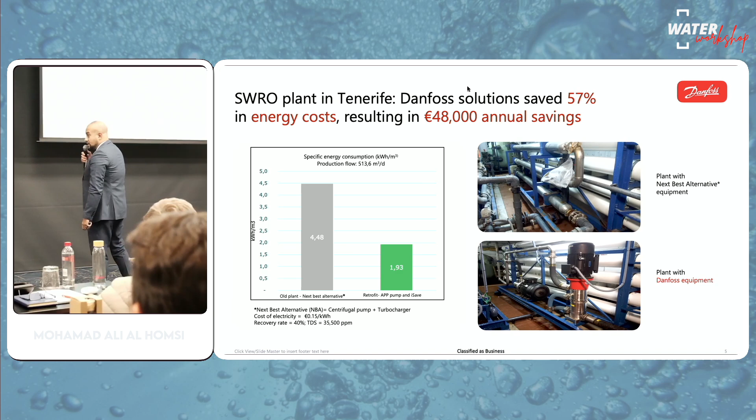Just one thing before you go forward - I just wanted to say that Canary Islands is one of the places where one of the first desalination plants was installed, because of their water demand requirement. So this case story is about a retrofit project where they had initially used a centrifugal pump with a turbocharger, and the key challenge was to reduce energy consumption while producing fresh water consistently.

So here we will see a graph showing the cost of kilowatt hour per meter cube on the left, and then we will show the old plants or the existing plants' consumption per meter cube. It was 4.48 kilowatt hour per meter cube, and the production for this plant was 500 meter cube per day.

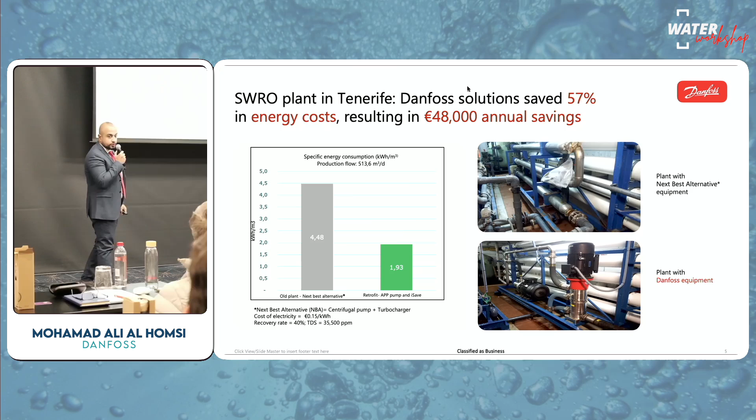As a preliminary design, we selected high pressure pumps, the axial piston pump, replacing the centrifugal pump, and a pressure exchanger, which is the iSave installed vertically, also to replace the turbocharger. The cost of electricity is around 0.15 euro per kilowatt hour. The design was on a recovery rate around 40% and the TDS around 35,000 ppm. By our calculation or preliminary design, we got 1.93 kilowatt hour per meter cube.

That's a huge saving. If we need to talk about percentage, we save around 57% in energy cost for them, resulting in a 48,000 euro annual saving.

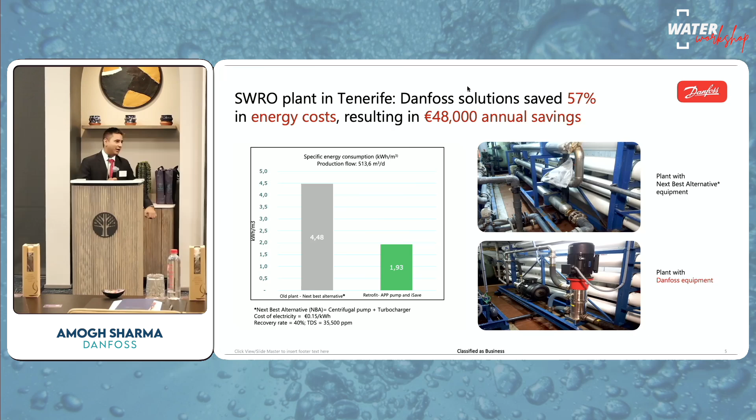I just want to add one thing. On the right hand side, you see two photos: the plant with the existing centrifugal pump and turbocharger, and then retrofitted with the Danfoss equipment. As we mentioned earlier, one of the special things about our products is the compactness. When I started my career, I remember building a lot of systems, and I used to tear my jeans a lot because of so many equipments here and there. This was like 7-8 years back, and this picture shows that in the above picture you literally don't have much space to walk around. When you retrofit with our products, you actually have much cleaner space to walk around and to assemble, disassemble, do on-site maintenance, and so on. So it's much easier, not just in energy savings, but also the footprint.

The amount of water produced per square meter is more when you look at our Danfoss technologies.

Next, resulting in savings, and this is where we can show it on this graph, comparing with what they have. As a Danfoss system, we showed that the SEC, or the specific energy consumption, is around 1.93 kilowatt hour per meter cube, and for the existing one, around 4.48 kilowatt hour per meter cube.

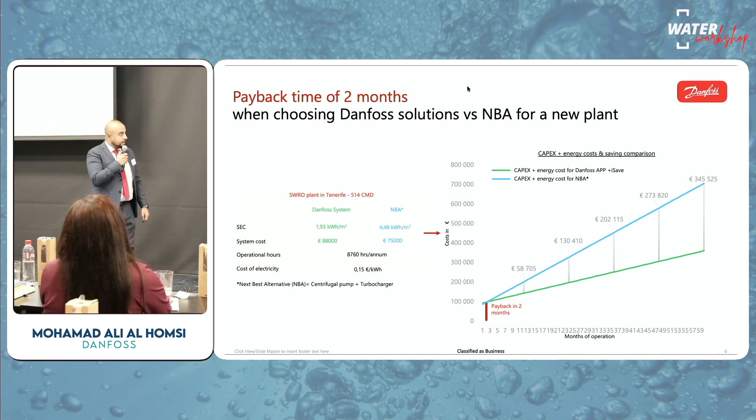This shows basically, if you just take it in a case where it's a retrofit project, and take a similar system, because you have already amortized or depreciated the cost of the existing system, so even if you just base it on energy savings, the payback is within almost 15 months. So within 2 years, that's a pretty good business case when you look at it from the economics feasibility side as well.

So now, do you have any questions?

Just to highlight something here, in the RO units, when we built our system, it's based mainly on the pumps. The cost of the pump is the highest, let's say, capex for the RO. If you can see here, we have the system cost around 88,000 euro. Comparing to what they have existing, it's a bit more expensive than what they have, but we prove it in the payback time.

Just to add one thing on this - coming from India myself, I see a lot of focus on the capital investment first from the customer or end user side. But we ourselves, when looking at buying a Tesla or any car for that matter, we are looking at the total cost of ownership.

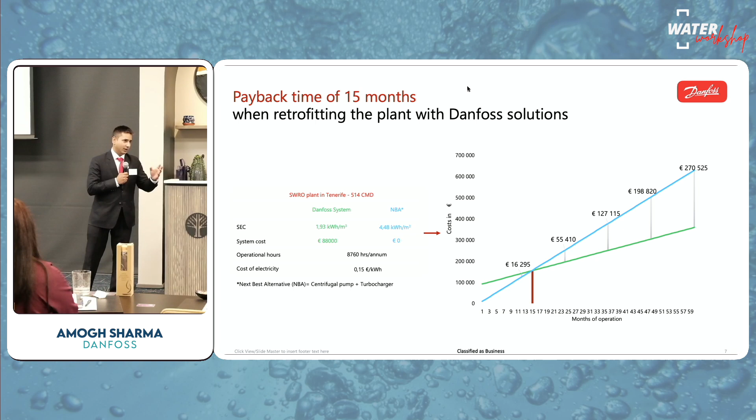The capital cost of an ERD or a high pressure pump is only 9% of the whole RO unit, whereas electricity consumption is around 55%. So you can have the cheapest pump and ERD, but the total overall consumption over the next 10 years, you'll be suffering with the operating cost. That's where we provide a solution to reduce not just the total cost of ownership, but also the emissions.

It's related to the iceberg - what we can see with our eyes, and under the water, it's much bigger.

Back to Paul, maybe you mentioned Saudi Arabia - not far from where I live. We were filling our tank with $1 or $2 in terms of fuel. Now it is more than $25, so the cost is increasing, and the attention for governments and countries on energy consumption is a must now.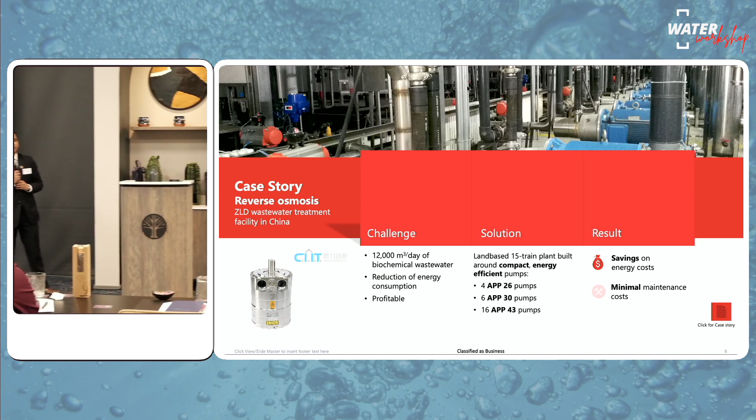So now we talked about how pumps can be put in parallel, and this is a case story for ZLD from China, where the customer already had a biochemical treatment plant with a first stage RO, and they wanted to increase operational efficiency, reduce the discharge, as well as increase the recovery rate of the system.

So the challenge was basically how to do this, because China is also a very price sensitive market. The key requirement was how to get the best energy efficiency of the whole system wherein they can have consistent water production.

Here we have four stages, in total 26 pumps of different flow size. The first stage has 43 cubic meter per flow, and then it reduces as you go higher up the concentration, to reduce the brine or reject water and increase the water recovery.

This was a testimony - what they appreciated was the reliability and profitability that brings to the whole operation of the facility, contributed by reducing the energy consumption and cost.

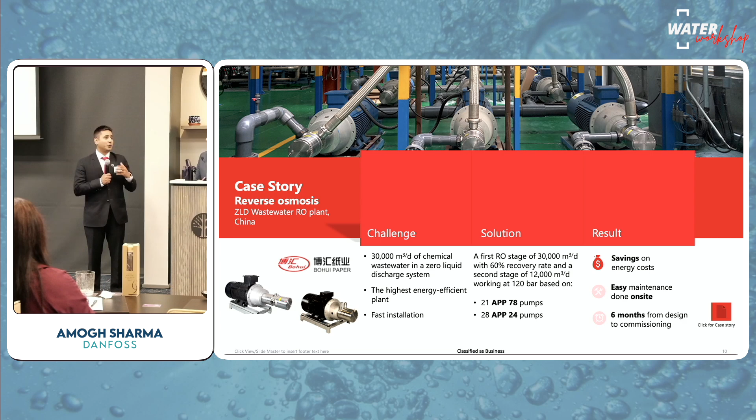This was a special testament from the customers that we were able to help, or contribute among other partners, to really help their facility keep afloat.

And that's where we spoke about the high pressure - they were using conventional systems in wastewater, and implemented the high pressure system, or high membrane, as we call it. They increased the recovery up to 60%, and even the production for this plant - that's also a testimony from the customer.

I think they really appreciated that we were able to, with our partners, realize this facility within 6 months and get their operations afloat, because that was the biggest thing for this paper mill company - a big challenge for them at that time.

And we are facing this a lot. In Africa so far it's not so prominent, but I see in India, even Europe, and many other countries where governments are enforcing these regulations on discharge, because we've had so many SWRO plants or RO plants. But what happens to the brine that is already being discharged? What can be done? In some cases there are really valuable minerals like lithium, magnesium, potassium, and edible salt as well.

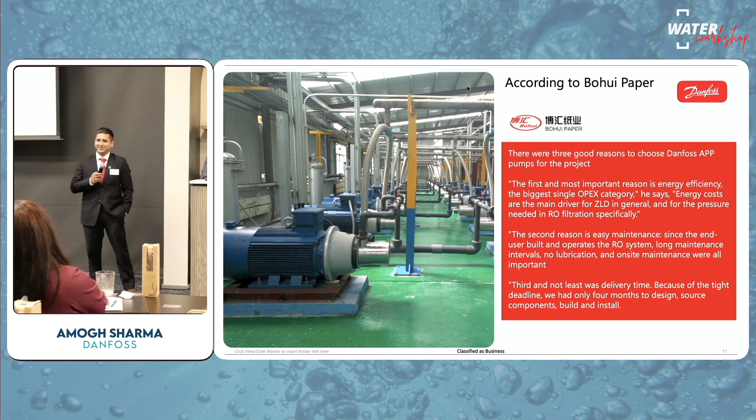Good, but yeah, that's it from my side. If there's any question, anything from your side, let us know.

All right, thank you so much for that presentation. I think this technology is quite interesting, maybe in South Africa we can adopt it, especially because we are an energy challenged country. My question is taking you a little bit back from your previous presentation, because you said that the pumping efficiency is independent of the pressure in the flow. I was curious to find out, does the membrane material affect the pumping efficiency?

The membrane material, of course the membrane is the core. I mean at the end it's a game of membrane, the RO, it's not always about pumps. But by time, of course the membrane needs more pressure, needs to apply more pressure to have the needed permeate. So in our design, we always have a safety factor to contribute to that. That's on the first phase.

Second phase, even in our technology, the axial piston, as I gave you an example, any variation in the TDS on the feed - because we get the feed and then pump it to the membrane - at the same time our pump can give the same efficiency. So if I need to give you, let's say, 10 meter cube today at 40 bar, I can give you also 10 meter cube at 80 bar with the same efficiency, with the same energy consumption designed for. So yes, it's always a game of membrane. The membrane needs to be maintained very well, but as a production, for you as a client, you are protected in this.

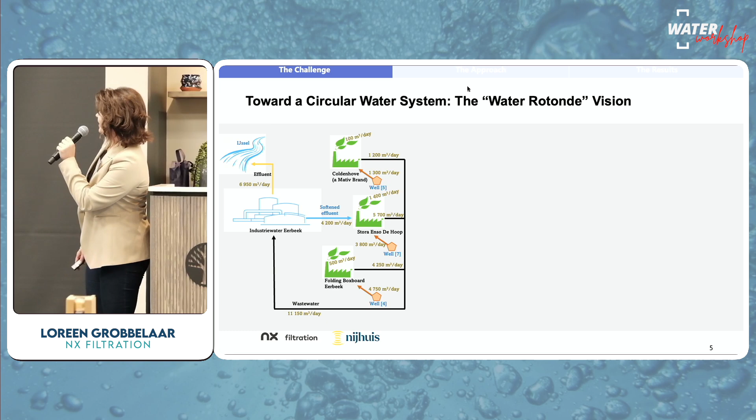Let me give you a quick overview of the schematic here. The 3 paper mills are these green blocks you can see. They all use well water, as I've mentioned, and this well water is used to produce the paper. The wastewater produced then goes to the Industriewater Eerbeek site, where it's treated up to a point where the effluent has been softened. Then some of that water goes back to the River IJssel, and some is reused in the factories again. So the idea was to make that a bit better and reuse a lot more of this water.

So instead of discharging to the River IJssel, all of it would be reused, and that's where the circular water use comes in. During the piloting or demos we ran, one of these water factories stopped operation, so eventually we only had two paper mills producing water going back to Industriewater Eerbeek.

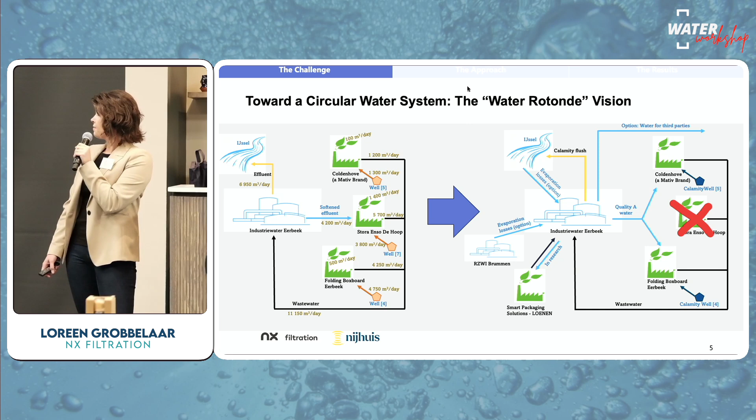During this total investigation, the partners also investigated how to deal with evaporation losses. It came about that we would use some of the water from the River IJssel, as well as from a smaller paper mill, Smart Packaging Solutions in Loenen, and also a nearby wastewater treatment plant, RZWI Brummen, where we also did a pilot with nanofiltration.

So our approach: in 2023, they looked at the engineering design of this entire process. NX Filtration got involved, and this is where we decided to apply our dNF80 membranes. The pilot we ran there was a Mexpert XL, with 8 modules installed, and the flow rate was around 10 cubic meters per hour, which we wouldn't really call a pilot, but more of a demo.

The main objective here was to demonstrate that the product water can be used to meet the paper mill specifications. We evaluated the reject and brine handling streams, and had to provide design inputs for a full-scale plant. That full-scale plant is 450 cubic meters per hour.

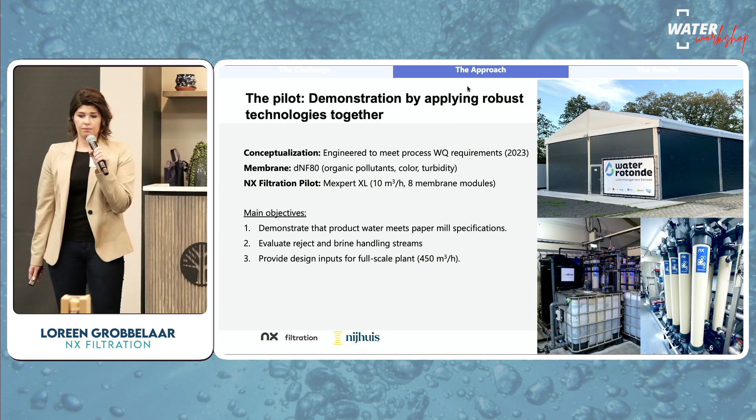So, how did we do that? The entire process was taking that softened water from the wastewater treatment plant and putting it through a 2-stage NF system. We used the concentrate from the first stream and reintroduced that to a second stage nanofiltration before it went for activated carbon and then electrodialysis reversal.

The main objective of the nanofiltration system was to remove your organics, like I mentioned earlier, your CODs, turbidities, color, also some solids, a little bit of your leftover calcium and magnesium, and then some sulfates.

That concentrate was further treated by coagulation and flocculation to remove the CODs, and then went back to the treatment plant. The concentrate from the EDR, the electrodialysis, also went through ion exchange for hardness removal, and then the RO concentrate was also further treated.

So we just mentioned a few advantages of this entire system: it was modular, so you could add modules, any of the process steps, as the plant grew further. Partial desalination, I believe that is part of the electrodialysis. The process is reliable, but we will see some of that in a little bit, in the results.

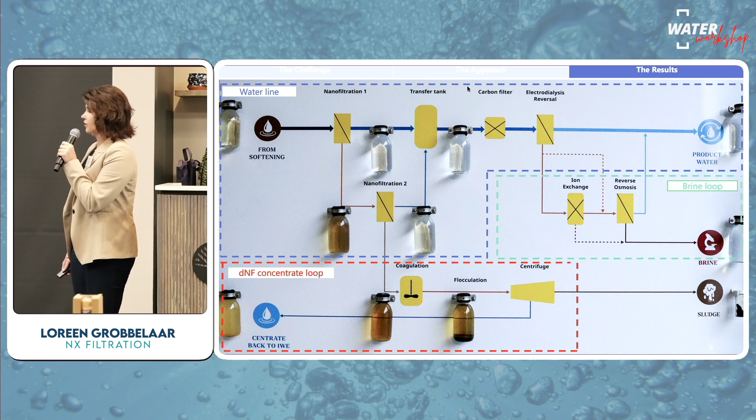So once again, taking the feed water through the nanofiltration and taking that higher concentrate, you could see the color is a bit more concentrated than the initial feed water, taking that right through to the product water.

The concentrate loop, as I mentioned, goes through coagulation, flocculation, and then through a centrifuge. The centrifuge sludge is a waste, and the centrate has been fed back to the industriewater Eerbeek.

So the results: I mentioned earlier that we had one of the factories closed while we were piloting, and even with that fluctuating feed, we still had stable membrane performance.

Unfortunately, I do not have the flux and permeability graphs here, but we are working on a paper that will be published before the end of this year, so that can also be distributed.

So mentioning that the feed water quality fluctuated, we managed to recover the permeability and also the DPs during operation. The plant operated at a recovery of 90%, the nanofiltration plant, and a flux of 22.5 LMH, which is quite demanding, we would say.

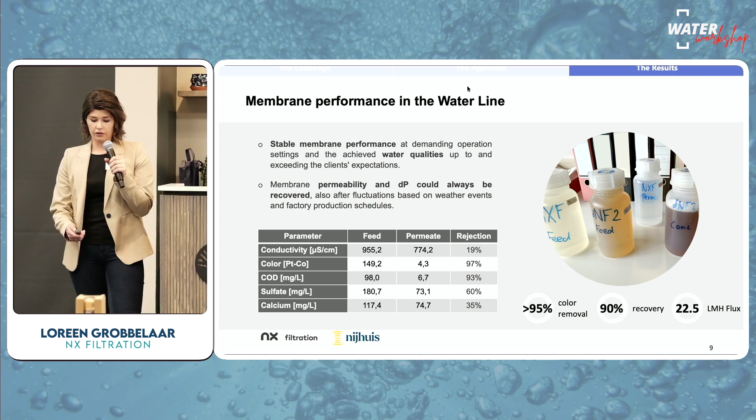And then just the key takeaways: like I mentioned, it was robust and stable performance with the membranes. The downstream processes were performing quite well, we would say, because you've got a good permeate that you form, and you put that through your GAC and your EDR.

So they operate a lot better, which gives you lower regeneration frequency on your GAC, and in turn lower OPEX on both of those downstream systems. It's a scalable solution, and we've demonstrated a high recovery concept due to the hollow fiber nanofiltration, concentrate recirculation, along with the RO brine treatment.

So that was the first one. I don't know if you have any questions.

Oh, sorry, it is a BAC. Yeah, sorry, it was a BAC. It's a mistake on our side.

Thanks. Yeah, I think it also depends on the feed water quality. So it's always something that we could run through a projection and see if there's a possibility, if it would be a feasible application for us.

I think you got about 90% recovery. I don't see the solids loading into this plant, but I assume it was quite low because it's come from the treatment process through a softening stage and into the NF, so the TSS would be pretty low. Yes, exactly, so the TSS would be treated upfront. That also gives us better operation in terms of cleaning.

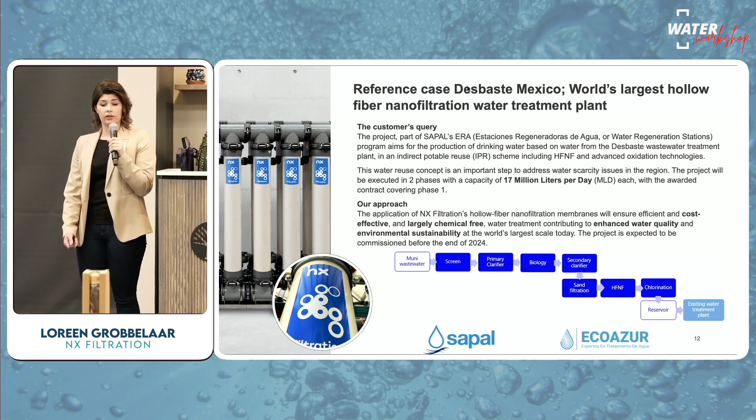The reason why is there's increasing droughts everywhere, but in Mexico we've seen since 2023 to 2024, more than 80% of Leon's territory is in extreme drought. Needless to say, they've reached day zero in the city of Leon.

A while ago in Cape Town we also nearly reached day zero, where we had to take 2-minute showers and not drink the tap water. But here in Leon they've actually reached it, and I've spoken to some of those people, and they really did not have a single drop of water in their taps. I think that is quite difficult to imagine for us, though in some cases we do have that. I'm talking now from a European point of view, but I know the challenges we also have in South Africa.

So what happened was we've had quite a few factors contributing to day zero. It was extreme drought, there was no surface water available, groundwater extraction was limited, and along with an increasing population, existing reuse practices were unable to alleviate this drought. They've reached day zero, and the city of Leon was looking at taking their wastewater - they call it the new era - to actually use that wastewater for their city to have drinking water available.

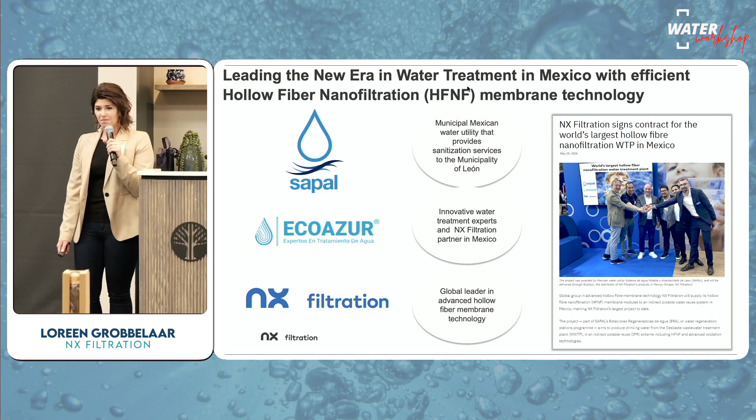So the construction is currently ongoing. The municipal phase 1, which is 200 liters per second, they are currently constructing, busy with the civils, and commissioning is upcoming. And then for the second phase, as I've mentioned, we've now secured the order, so that will probably also be commissioned next year.

We ran a demo plant there with our DNF80 membranes, and that was in 2022. The reason for them going with the full scale was that the demo plant operated really well, and they could see that this could fit into their existing treatment scheme.

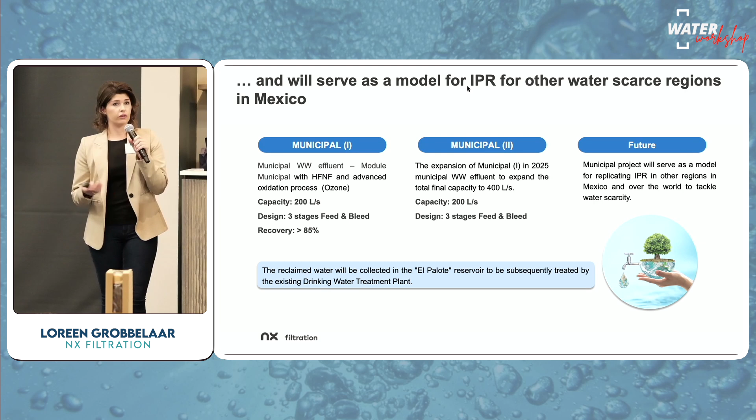So the first phase was 200 liters per second, 3 stages, feed and bleed, and more than 85% recovery. The second stage is an exact duplicate of that, and in future this municipal project will serve basically as a validation that IPR, indirect potable reuse, can be used going forward.

And look, it's not a new thing, we've been doing it all over. I believe it's Namibia, and I believe Cape Town is also now looking at it in the Faure project.

The existing plant has some pre-treatment, coagulation, flocculation, primary sedimentation, and then activated sludge as secondary treatment. This is where the upgrade comes in, taking that secondary effluent, passing it through a 20 micron screen, and then directly into the hollow fiber nanofiltration membranes. From there it will go through oxidation, ozone, an activated carbon polishing step, and then be pumped to a reservoir where it will hopefully mix with some rainwater and be distributed to the drinking water plant, where it would be further treated and then distributed as drinking water.

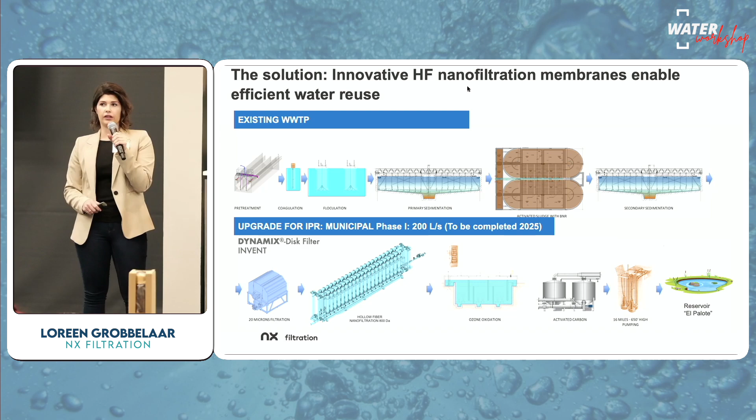What we've shown with the pilot system was that it could be an energy efficient way to do indirect potable reuse, and again we're avoiding chemicals - no coagulants, no flocculants being dosed before the membranes. Obviously with the previous steps, yes, but not with the membranes itself. Yeah, that is my end. Thank you.